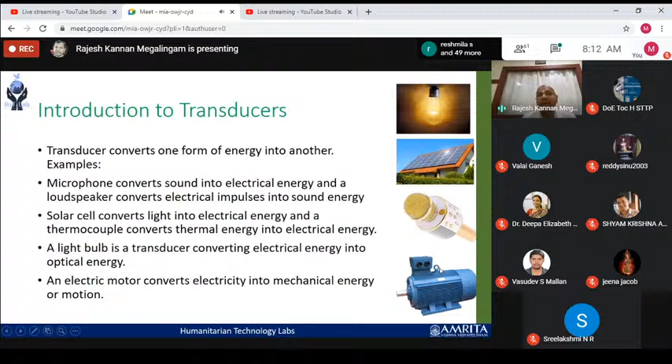So there are many categories of transducers. Electrochemical - some of the important ones in day-to-day life: battery, which converts chemical energy into electrical energy. Then electroacoustic, like loudspeaker or microphone which we deal with in day-to-day life, particularly during online classes. Then electromagnetic transducers, obviously generator, which is a common example.

Then electrostatic - we might not have dealt with that, this is not commonly used or commonly seen everywhere. Then electromechanical, obviously motors are supposed to be electromechanical, generators also. Some of you might have used strain gauges to measure force or torque.

Then comes the photoelectric transducers - you would have dealt with this, obviously a light bulb is a photoelectric transducer. In labs or for projects, you might have used photodiodes. There is also thermoelectric - temperature measurement, LM35 is a thermoelectric sensor converting temperature to electric pulses.

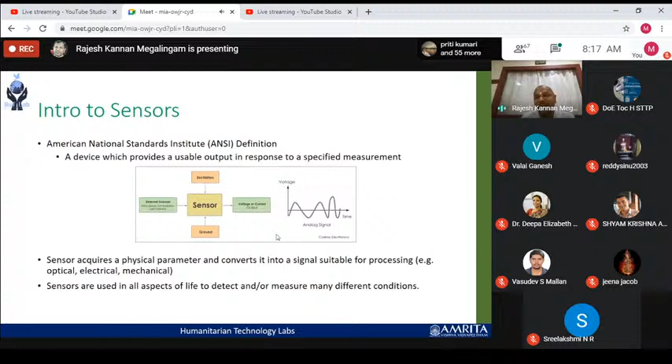So this is a typical difference shown here. When you classify something as a sensor, when you classify something as a transducer, you already know the definition: in general, it converts one form of energy into another form, but they do not quantify the conversion. That means the output is not meaningful for us to interpret.

So now if you're in your room, if your light is switched on, you get brightness, right? But that is a transducer. But how much brightness, how much lumens, you don't know. So once you go into that aspect of quantifying the amount of output through some processing, then the word sensor is more suitable.

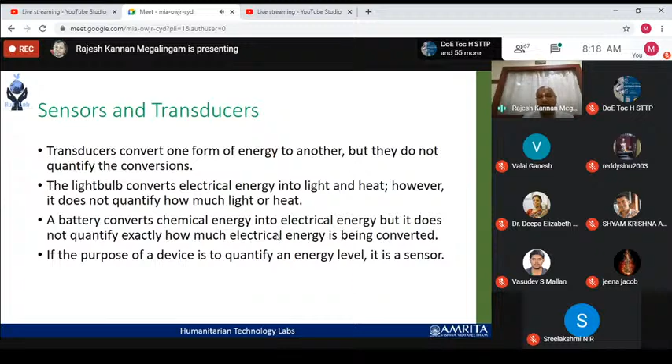So we already have 5 senses: eyes, touch, your hands, skin, your nose for smell, then the tongue for taste, and the ears for hearing capability. So the brain is the heart here, it processes whatever the input in the form of the sense organs, and then we get a meaningful output.

So any of these sensors receive signals and message the brain, which outputs a response. So when you feel something hot, when you taste something sweet, it is always the brain that is giving out this meaningful information, not your skin or your tongue.

So now we are going to go into the types of sensors. If you are already into building some robotic projects, you might have come across some of these sensors. Thermal sensor, obviously some kind of temperature sensor you might have dealt with. Mechanical sensor is very important nowadays. So many things happen where you need to measure the pressure or the acceleration, and the liquid flow,

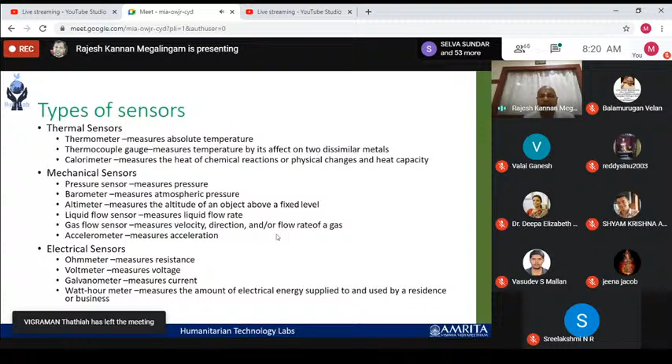Electrical sensors, most of this we would have used in the labs, particularly electrical. Chemical sensor, CO2, some of you might have used in your project. CO2 sensors are useful for detecting the presence of a human being. So that can be used in disaster management to identify victims. Then optical sensors, these are all common sensors which students build projects like LDR and all. IR, those things are all commonly used in many of the student projects.

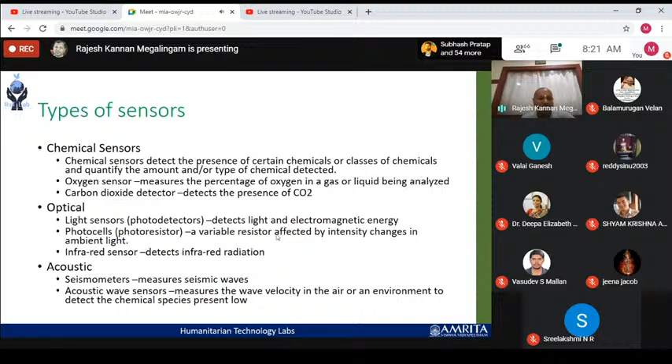So before we continue, one video demo is there. So this is a project, as I mentioned, which won several recognitions. It also won the IEEE Foundation funding of around $7,800. I think this was the first project that was funded by IEEE in our campus. That's long back, maybe 8 years before. And it also won the IEEE, I don't remember, a few other awards it won.

So this is about recognizing the hand gesture, and then controlling the wheelchair. The goal is to help quadriplegic patients or elders who don't have much strength in their arms to hold the joystick.

You would have seen the powered wheelchairs. Commonly, the control interface is a joystick, but you need to hold it and keep operating it continuously. For that, you need to exert some pressure, and your hands should be at least healthy to a moderate level.

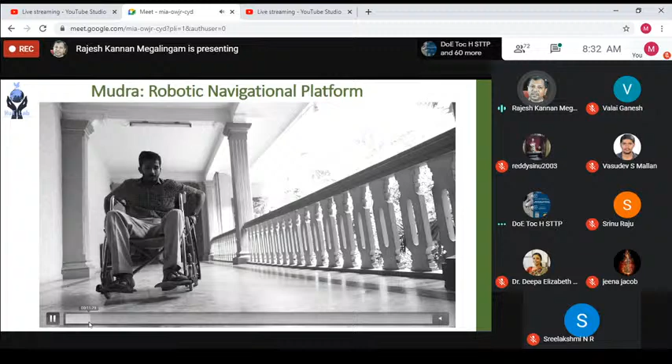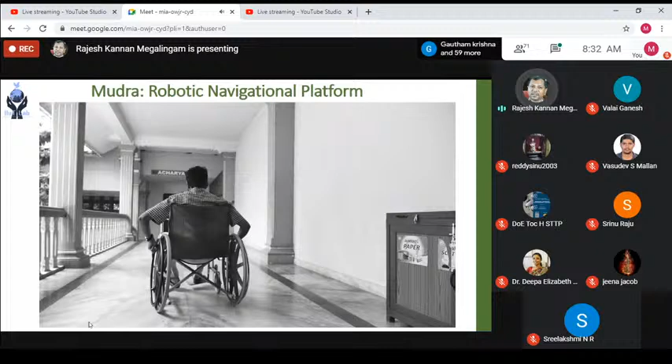You can see that people often use mechanical wheelchairs in India because for some, even the electrical wheelchairs are not affordable. There is also a social issue with dealing with people using wheelchairs. Most wheelchair users are ignored, even by their family members. So that is the situation in India.

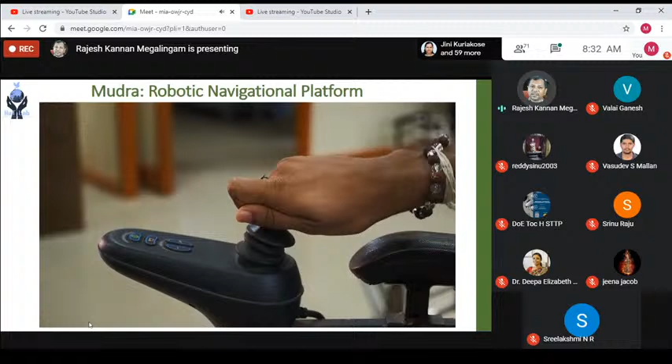Here you can see the joystick control unit, which is the default control unit used in the wheelchairs.

Here is the gesture pad, which we call the G-pad, made with an IR sensor array. The user can move the arm over the IR pad or the G-pad. This is a group of BTech students working on that.

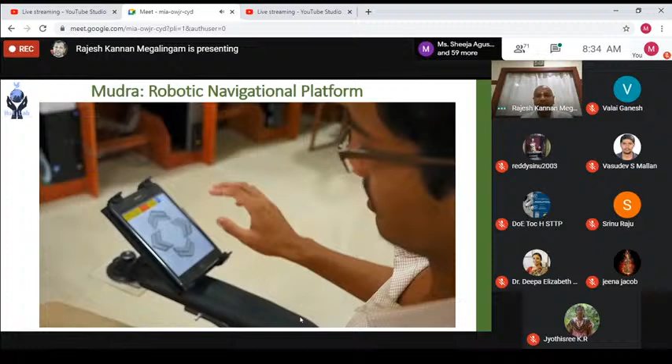I'll skip this part. You can just move the hand over this G-pad, left or right or straight or stop, so that accordingly the wheelchair can move forward, reverse, right, or left.

We also developed a mobile-based Android app. You can see a tablet used with the app with arrow marks. You can just touch the arrow marks, whether you want to go forward, reverse, left, or right.

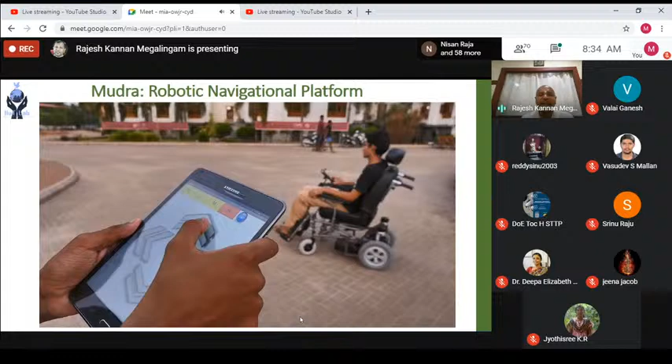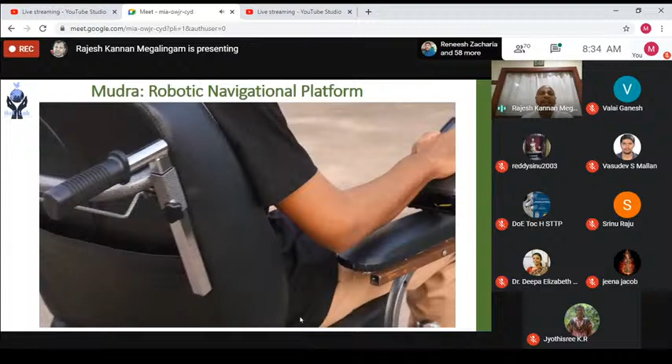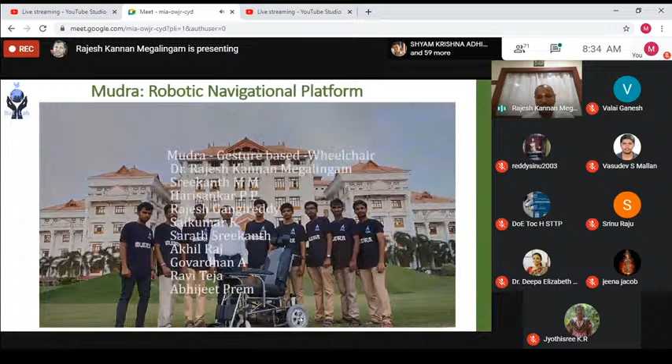The advantage is that even the nurse or caretaker can control the wheelchair. If the patient is really sick and even hand gesture is not possible, the caretaker can operate easily with the G-pad or with the app installed in the tablet. This is the group of students who worked on this wheelchair.

So now, before we proceed further, can anyone answer what sensors are used in this navigational platform? Actually, there are also actuators, because the wheelchair has to move, but since I haven't started the actuator topic yet, I am restricting my question to the sensors used in this project.

So we have encoders. What is that? We have rotary encoders, sensors. Yeah, encoder is a sensor, but in this one we are not using the rotary encoder because we are not keeping track of how much distance the wheelchair moved. Rotary encoders are normally used to keep track of how far the wheelchair or any robot traversed. So here we don't use the encoder.

I already mentioned the G-pad is made with an IR sensor, so there should be an IR sensor and a photodiode to sense the light. Those are two types of sensors. And there should also be an ultrasonic sensor to detect the obstacle, because accidentally the wheelchair should not go and hit somebody or the wall, even if the user is not alert. The robot should be alert so it should not go and hit.

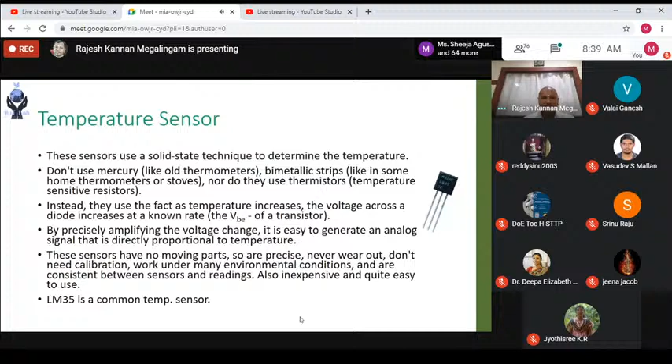This CO2 sensor, the carbon dioxide sensor, is used as a signature of human life, because in disaster hit areas, if some victim is stuck under rubble and struggling, the CO2 sensor can sense the presence of life.

Research is still going on in this area. There are some commercially available CO2 sensors which sense up to a few tens of centimeters, but research is going on to detect human presence even as deep as 5 meters. In fact, this is one of the sensors we use in one of our search and rescue robots.

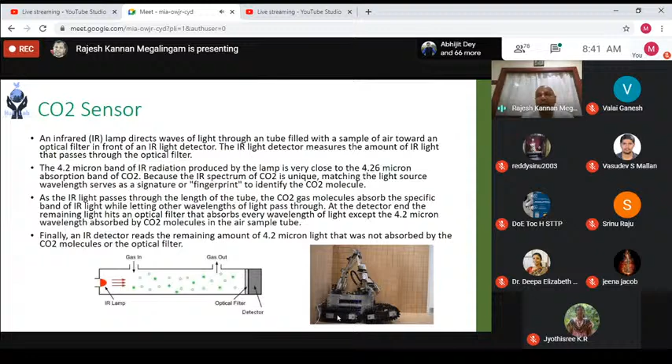As I mentioned, the human body radiates carbon dioxide. If there is a huge concentration of CO2 at some place, that means there might be a human presence in that place.

Next we go to the LDR, the light sensor. Light sensors in common detect light and create an electrical signal. LDR is one of the most commonly used sensors by students for robot projects. It's nothing but a kind of photoresistor, and the electrical quantity is resistance, which varies according to the light intensity.

If there is very high light intensity, the resistance will be low, meaning a huge amount of current can pass through. If there is no light, this acts as an open circuit because the resistance will be high, and huge resistance is similar to an open circuit, so the current that flows will be very low. This property can be used to measure the presence or absence of light, or how much light is present.

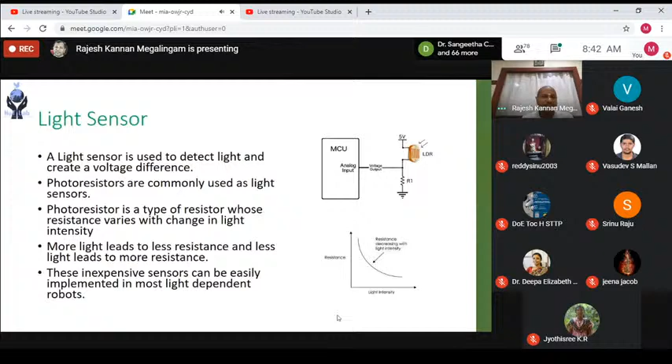Now this TSOP, a thin small outline package IR sensor, is also light dependent. Normally, for line detectors, commonly used in robotic projects for line detection, they use an IR LED and a photodiode.

The IR rays go and hit the black line, and the reflected amount of light is captured by the photodiode, and accordingly an electrical signal is generated. Based on that, the robot can traverse along the line on the ground.

But the problem with this kind of setup is that if used under sunlight, since sunlight has a good amount of IR radiation, it would affect the photodiode outcome. So you get a random, spurious output, not a predictable one, and your robot might behave unpredictably, not following the line.

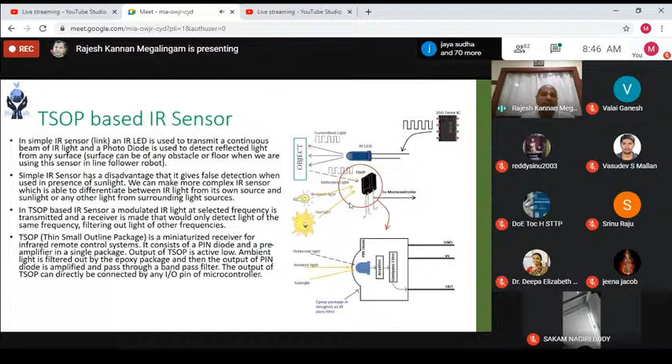Right, so now let us go to another video demo. Again, I'm thinking your audio is going to be a problem, so anyhow, I'll give a live commentary of what is going on. So I'll do a short introduction.

This was an inspiration from a Google museum in Bay Area, California, because I happened to visit this Google museum in 2013, and at that time the first car, the Google car, was on display in the museum. Myself and one BTech student who had the opportunity to present a paper at a Global Humanitarian Technology Conference at San Jose were discussing about the Google car, and we came up with the idea: if self-driving can be used for comfort, why can't you apply that to help some people? That is how we came up with the self-driving wheelchair.

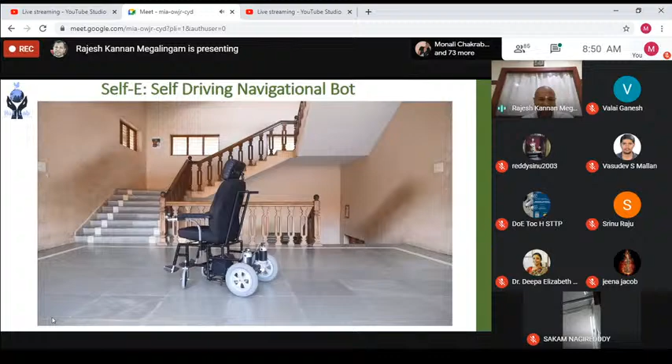Life easier, but the technology can also be extended to wheelchairs. So this is the self-driving wheelchair. The interest came out after— Sir, is the audio there, sir? Oh no, is the audio there? Oh good.

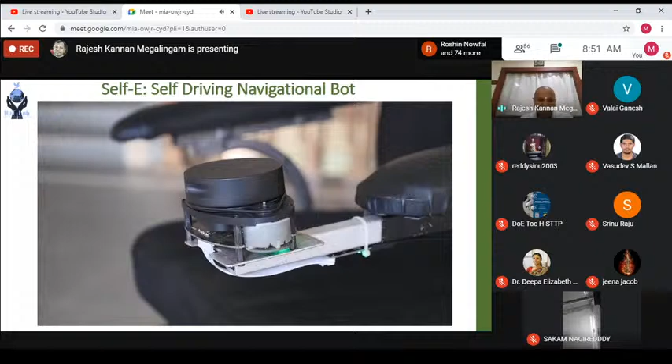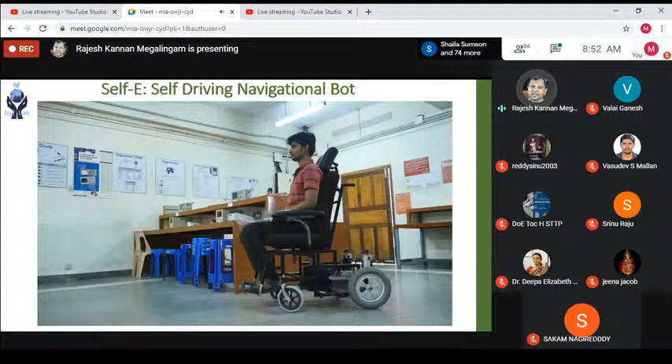To travel from one place to another in an airport, we realized that people with mobility issues face a lot of difficulties in their day-to-day travel, and most of the times have to depend on a second person. Our self-driving wheelchair, Self-E, can change the way society looks into wheelchairs. Self-E system has three phases. In the first phase, the wheelchair is driven through the environment where it has to operate and creates a map of the environment. A similar map is created in the Android application that we developed, where the user can point to the destination they decide to travel to. Once the map is created, the destination is pointed through the app, and Self-E wheelchair plans the shortest path and moves the wheelchair towards the destination. The hardware equipment we use consists of a single laser scanner. This laser scanner can identify the environment and also moving objects like we do. The onboard software automatically reroutes the path while avoiding any sudden obstacles in its path. Our self-driving wheelchair, Self-E, is fully operated using any Android-enabled device like a smartphone or tablet. The users have three different modes to operate Self-E: manual, auto, and fixed modes. The manual mode has easy access to the wheelchair with a simple direction interface where the user has to continuously navigate using the app. The fixed mode is used for navigating common places like shops in airports or rooms in hospitals where the destination is known in advance. In auto mode, the user can choose any destination on the provided map. The user has to just point to the desired location using the Android device and the wheelchair starts moving. Self-E can also navigate through tight spaces like passing through doors, corridors, and even getting into a lift. This autonomous technology can be used to deliver goods in industries, food in restaurants, people in airports, hospitals, and grocery shops, etc.

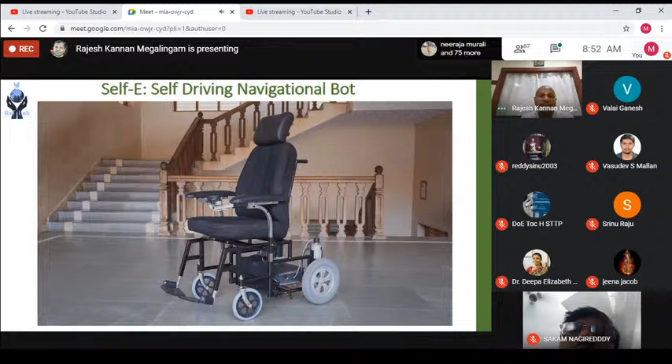Yeah, so you can see that it has good scope for transporting COVID patients, right? Because the patients themselves can navigate, thereby avoiding direct contact with wheelchair pushers or any caretaker.

Apart from being used in general cases like elders, right, airport people need a lot of wheelchairs, right? And the problem in the airport is that there will be a wheelchair pusher who would take them from the entrance of the airport to the gate. For example, if these elders traveling in the wheelchair want to go for some food or a bathroom break, it will be very difficult because the wheelchair pusher may not help, right?

So in such a scenario, if there is a self-driving wheelchair, people can be at their leisure. They can go to a restaurant to eat, they can have a bathroom break, they can go for shopping even before reaching the gate. So now coming back to our topic, what are the sensors do you think that is used in this one?

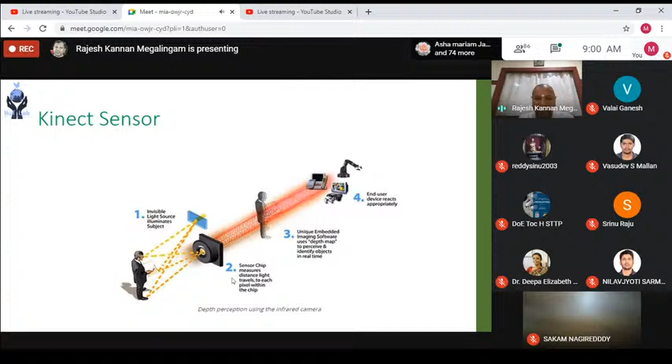This data is integrated with the Kinect software, which is custom software, not open software. So the sensor and the software are integrated together, and very advanced algorithms work on the data collected from these sensors for facial recognition, depth identification, or sound and voice recognition.

When it is received, the LiDAR is able to map how far this object is. It will not know what the object is, right? It's not like Kinect, which has a camera. This has only a laser scanner, so it can only map the depth. Accordingly, a map of the room is created, and once the map is created, you have all the information you want about a room or facility, and we can use that for navigation.

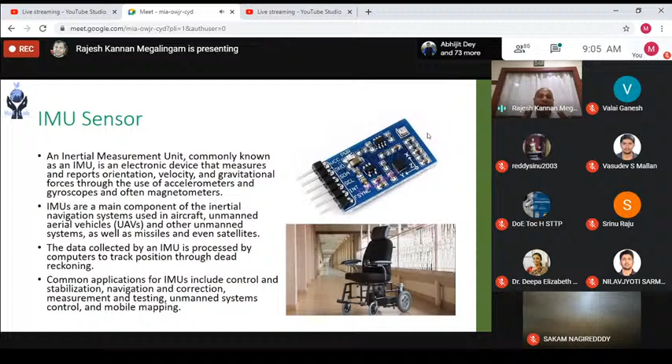Now I'm going to show you one robot that we developed at the lab.

Let us see. Is it audible? No sir, you're not able to hear? I don't know why some works and some doesn't work. Speech recognition, can you hear?

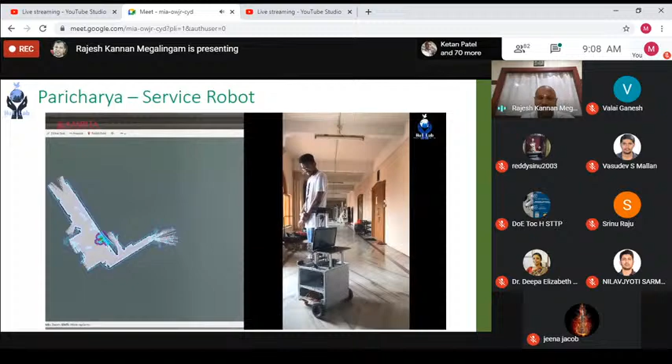The mapping of the environment is done by the gmapping package. This is the map of our HUT lab, which is divided into 4 different sections: Section 1, Section 2, Section 3, and Section 4. Navigation to the desired location is obtained by localizing through the AMCL package and integrating it with the move-base package.

For object recognition with the Kinect sensor, we are using an algorithm called YOLO, where the robot needs to be trained with different images of objects. The robot can recognize the trained objects and also gives the object midpoint coordinates with respect to the origin of the Kinect sensor for pick and place purposes. In case of a person, the robot can estimate characteristics like gender and age.

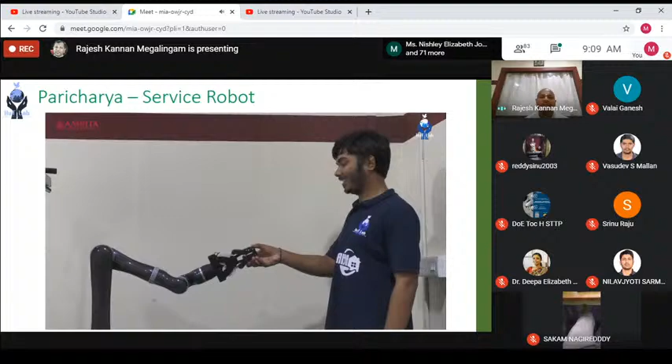Currently, we are using the 6 degree of freedom Kinova arm for pick and place and for basic human-robot interaction. Here is an example of human-robot interaction where the arm is used. We are currently developing a gripper to serve as an end effector for the arm to hold objects.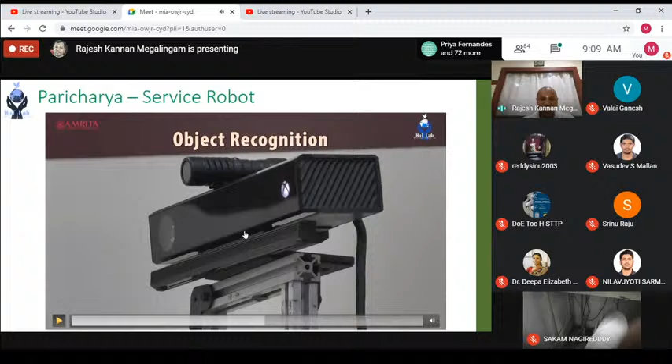So what sensors do you think are used in this one? Some of this we already saw. The Kinect sensor, you could have seen at the top of the robot. Yeah, so that is the Kinect sensor here. There is also a mic attached to that for voice recognition. So there is image recognition, object recognition. You can see laptop, bottle, identified chair.

Face recognition. So this manipulator, the robotic arm, also uses sensors. Can anyone tell what sensors are used in this manipulator? Okay, so that might be a difficult one. Let us see the sensors. As we look at the sensors, we can get into more details about the sensors used in the manipulator.

So next sensor is a load sensor. If you want an immediate example, you would have seen electronic weighing machines in shops. Even in grocery shops nowadays, electronic weighing machines are used. You can see the weight in terms of the decimal number. So the load cell or sensor is being used in order to get the weight information.

The forces such as tension, compression, pressure, or torque are converted into electrical signals. These electrical signals can be calibrated, and the amount of weight or force or tension, whatever you want to measure, can be measured with that. There are several types of load cells: hydraulic, pneumatic, and strain gauge. Depending on the application, you can choose one of these load cells.

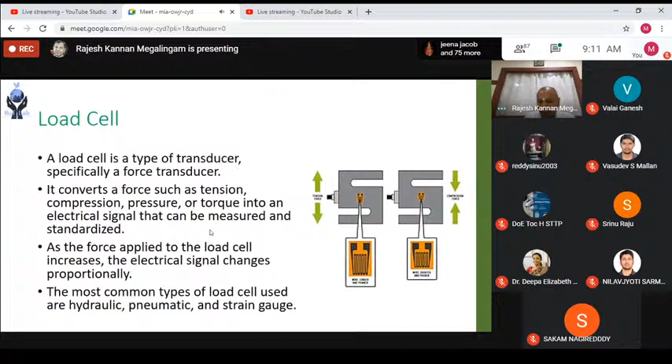A commonly used sensor you might not have thought of as a sensor is the potentiometer. You already know it as a variable voltage device, depending on the resistance. So depending on the varying voltage, you can measure the quantity you want to measure. It's commonly used for volume control, like in your audio equipment.

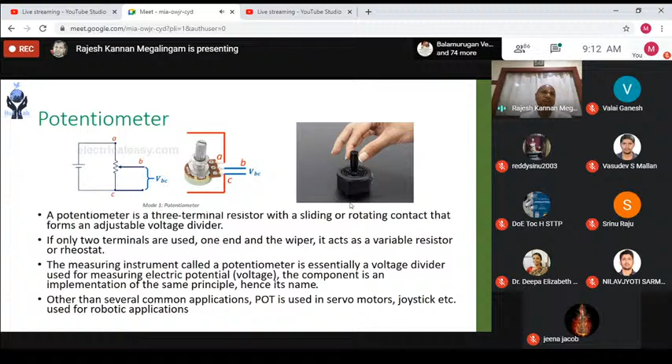You can see even in a joystick, the potentiometer is used. One of the common applications is in servo motors, where they use the potentiometer to get feedback and keep the motor powered up correctly. That is the actuator actually - the servo motor is an actuator, and in that, the potentiometer is used.

Now coming to the microphone. The microphone converts sound into electrical energy. There are two types of microphones: dynamic and condenser. Both use a kind of diaphragm plate where, when the sound energy hits, it generates vibrations, and there is a voice coil which converts these vibrations into electrical signal.

Dynamic microphones are commonly used in open air theaters or auditoriums, where huge sound is being dealt with. Whereas the condenser microphone is used in voice processing and audio processing, where you need to capture even a minute sound in a very controlled environment. You use the condenser microphone.

Current sensor is also commonly used - the amount of power. These are all used in robots. I can show one of the robots where we use this, in fact the manipulator I showed. A current sensor can be used to find out how much current is drawn by the actuators used in the manipulator or the robotic arm.

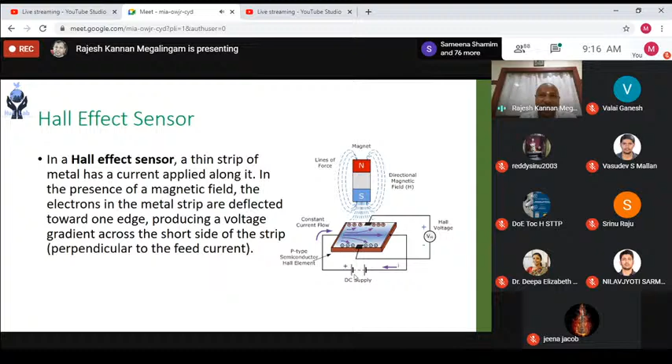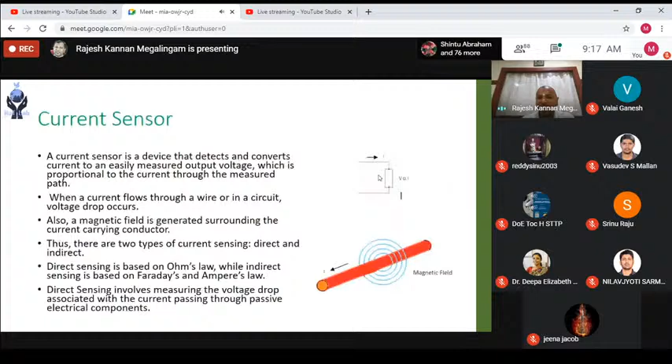This is another sensor used in advanced manipulators. You saw that the robotic arm used in that robot is a Kinova robotic arm - this is the robotic arm you saw in the video. That is a very advanced, lightweight manipulator which uses torque sensors.

What is torque? Torque is a rotational force. It's like you have a regular force, which is a directional force, whereas torque is a force in rotation. So depending on this torque,

the sensor is built with a strain gauge. The strain gauge is a similar concept to the load cell - in fact, some load cells also use strain gauges. Depending on the strain created because of the rotational force, this strain can be converted into an electrical signal, processed, and then calibrated to find out how much torque is being used in the actuators.

So that is about the torque sensor. I think there are several other sensors, but I'm stopping here with the torque sensor. Then we are going to switch to part 2 of the presentation, which is going to be the actuators. But before we go to that, is there any question on the sensors?

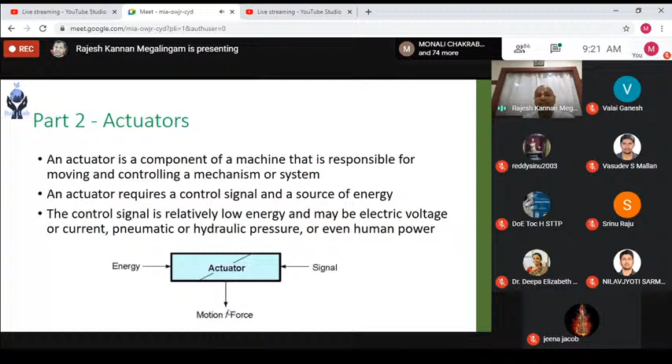So there are commonly 5 types of actuators. Hydraulic actuators use a liquid, a kind of fluid, in order for them to operate. Pneumatic actuators use gas or air in order to make them work. And electric actuators are what most electronics and electrical engineers might have witnessed, because hydraulic and pneumatic are mostly used by mechanical engineers in factories, some hi-fi stuff, but not in the kind of robots that we build at the labs.

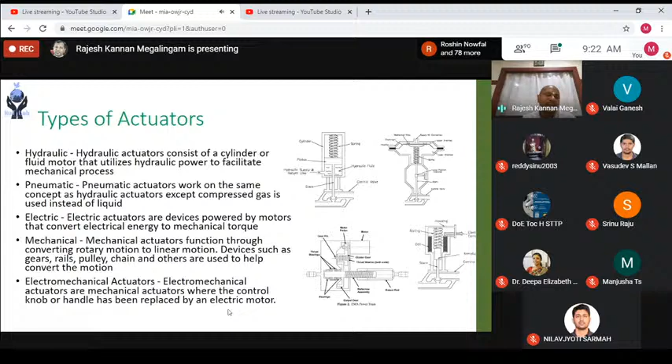And there are mechanical actuators, purely mechanical in nature - devices such as gears, pulleys, chains are some of the mechanical actuators. There are also electromechanical actuators, like an electric motor - if you have a control knob with the electric motor, and you rotate the knob or the potentiometer, the motor speed can be increased accordingly. So those kinds of actuators, you call them electromechanical actuators.

It's a very, very complex and challenging system, because most robots that are used, or that you would have seen, operate in a known, predictable environment. If you see a pick-and-place robot, it's operating from the ground, so there's no worry about the weight factor or stability in particular. Whereas this robot, the coconut tree climber, is very challenging because it has to operate in an unknown environment - each coconut tree in the world is unique. So for a perfect robot, you must have tested it with all the coconut trees in the world, which is impossible.

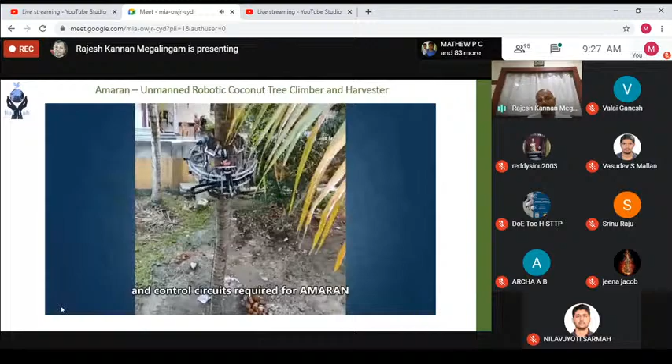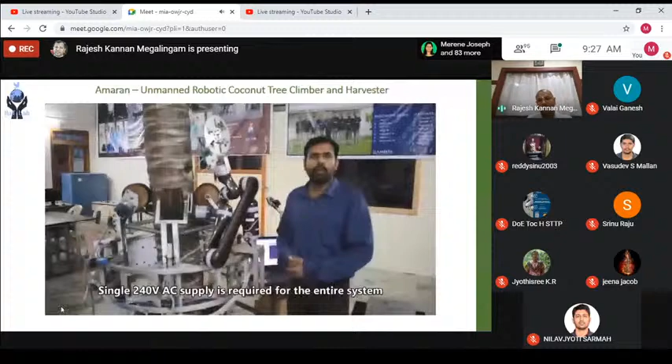A Kinova 6-DOF robotic arm with a customized electric cutter is used as the harvester. Using track motion, we are increasing the workspace of the harvester. A single phase 240 volt AC supply is required for the entire system.

So that is about the project. Some of the recognitions and awards - we filed 3 patents, one US patent already approved for this.

Now we will go to some of the common actuators, DC motors. All engineering faculty should know the basic principle of the DC motor. You have a coil, and a coil carrying current generates a magnetic field, so it can become an electromagnet. That principle is exploited in almost all actuators.

This is a simple DC motor which uses the carbon brush to keep the contact while rotating. The wires should not get twisted, so they use this carbon brush mechanism.

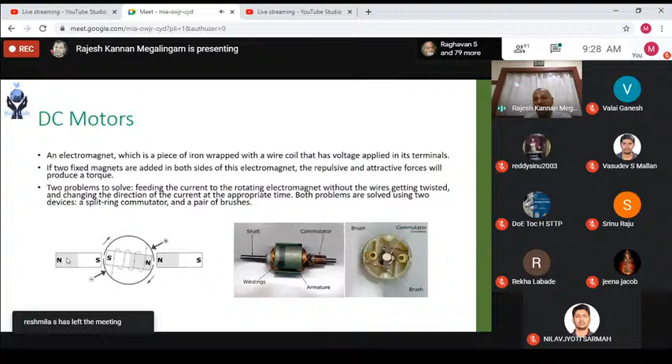Now there is another version, the DC geared motor, which gives you more control compared to the DC motor. The DC geared motor produces a lot of torque, meaning the load you can carry is increased. With the plain DC motor, you don't have that control.

A precise control is not possible with a plain DC motor. Whereas with a geared DC motor you can bring some precision, but not as much as BLDC motors or servo motors. Geared motors, and DC motors in general, are not so precise. Also, DC geared motors are costly because of the gear setup.

Also, if you look at speed and torque, they are inversely proportional. If you want high speed, your torque will be less. If you want high torque, your speed will be less. That's something that always binds these two.

Still, geared motors are very commonly used in robots. In fact, this is one of the robots we developed, the search and rescue robot - this is the 3rd version of the robot. I can show you the video, which uses geared DC motors.

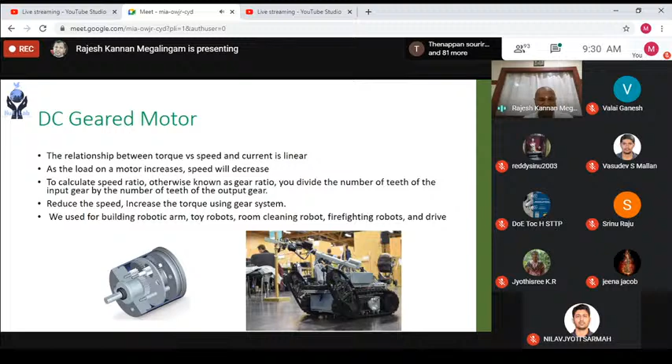For precise control, a servo mechanism is used, with feedback built into the servo motor. This gives very precise control, because if you want to accurately move to a specific length in millimeters, you need a servo motor. For example, if you want to build a pick and place robotic arm, you can use a servo motor.

Normally, pick and place arms that students build use servo motors. But in reality, industry uses BLDC motors because of higher precision and because they can afford the cost. BLDC motors need a special controller which makes them very costly, whereas servo motors can be controlled with an ordinary microcontroller, even Arduino is enough. So students find it easy, and for student projects it's okay, but there are very hi-fi servo motors used in industry.

We built a robotic arm in this coconut tree climber. The one you saw in the video uses a Kinova manipulator, which is the 12th version. This one is the 8th or 9th version. Till that time we were using only servo motors for all the degrees of freedom, all the joints. But we had a lot of issues, as I mentioned, with coconut cutting, cutting as bunches requires very precise cutting. We had a lot of issues with the servo motor, so we switched to the Kinova arm, which used BLDC motors.

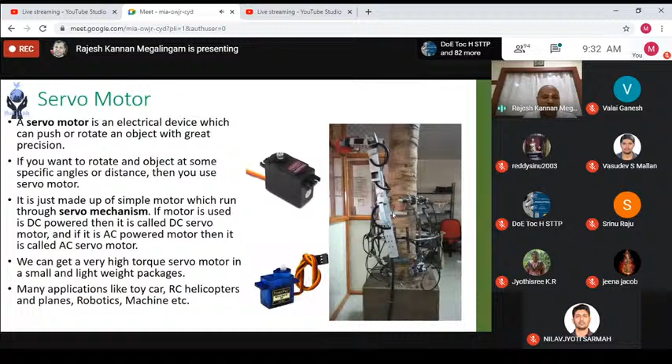So this is the servo mechanism. I mentioned something about the potentiometer being used, you can see that part is being used. The servo is made up of a simple high RPM DC motor and a very compact gear mechanism, which is what gives it the name servo motor.

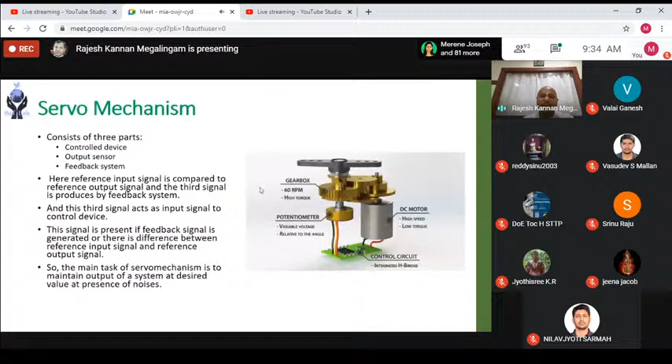You can ask, how is it different from a DC geared motor? That is where the feedback comes into picture. In a DC geared motor, you don't have feedback through a potentiometer. So when you power up a DC geared motor and don't operate it, versus powering up a servo motor and not operating it, the servo motor would be able to supply the same amount of current to the load attached to it, whereas the load attached to the DC motor will not experience the same current if you just energize it without operating it. That is the difference, and that's why servo is much more useful in precision robotics.

So this is a search and rescue robot, a short video you can see. This is the third year we are into this project. We already built 3 versions, with 3 groups of bachelor students working on it, and a 4th group is currently working on it.

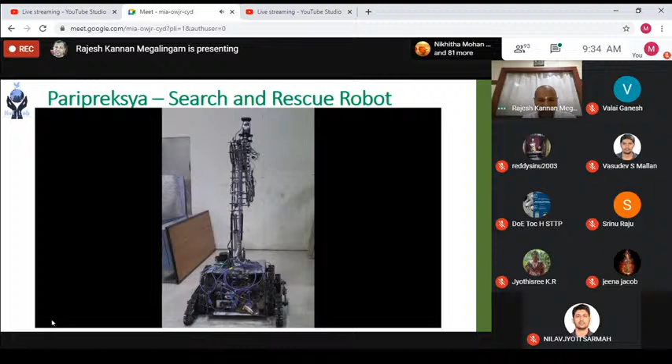So this is the first version of the robot.

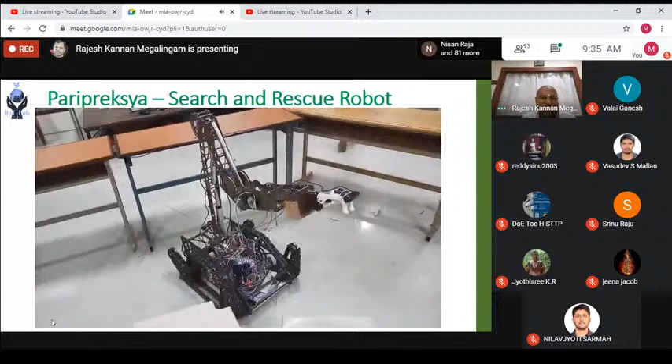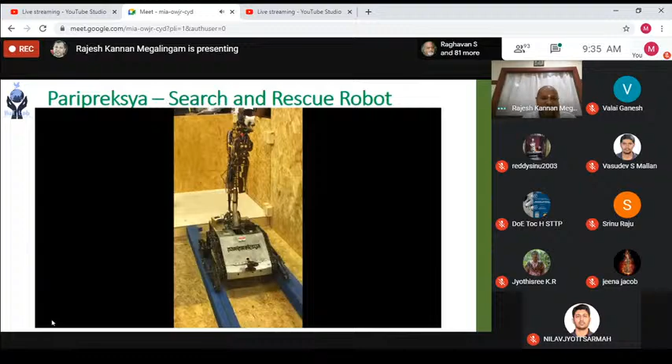This robot went to the Robo Cup Germany 2018. We were in Germany, and we were the only team from India.

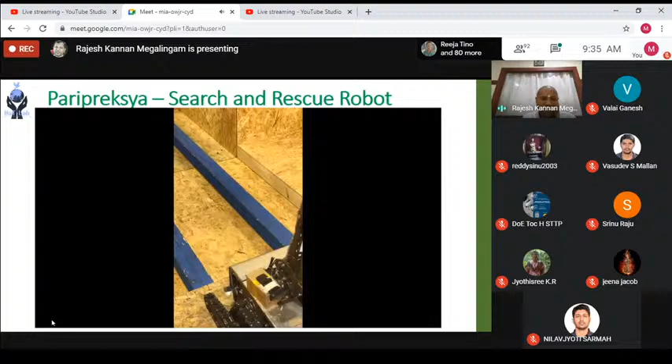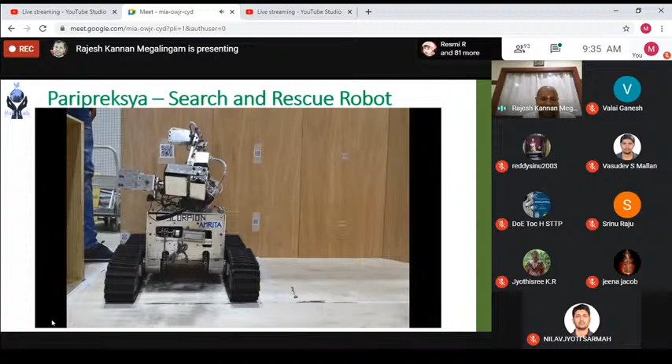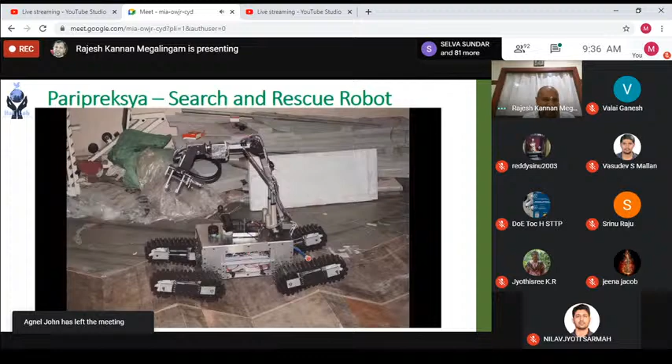So the second version, from 2019 - actually the first one was in 2017, this one is 2018. We went to Japan for the World Robot Summit, and now we are testing it at the lab. This is the second version.

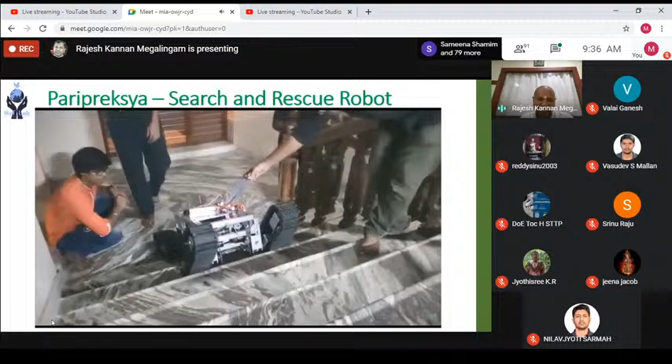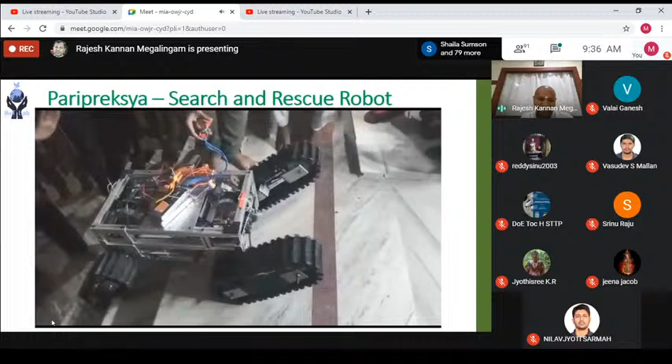This is during the competition at Japan, Tokyo.

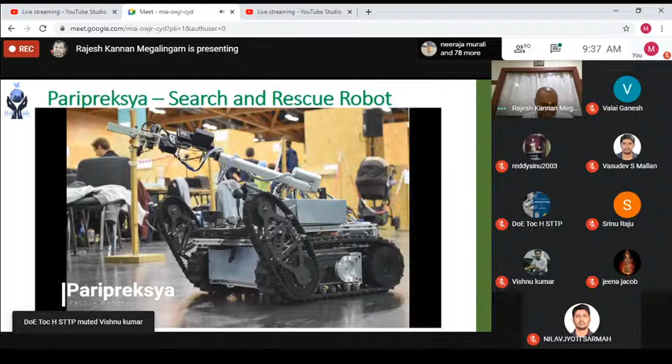So this is 2019 January, the third version. You can see there are only 2 grippers.

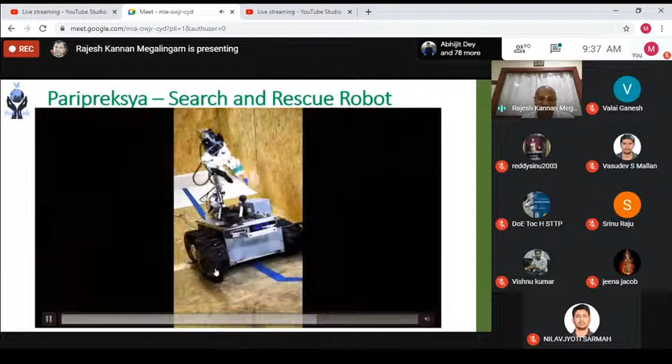The operator won't be able to see the robot directly. There is a camera on the arm, and you can see the lidar sensor also used here. Through the camera, the operator has to see the environment and operate the robot. There will be a cabinet for the operator to operate from.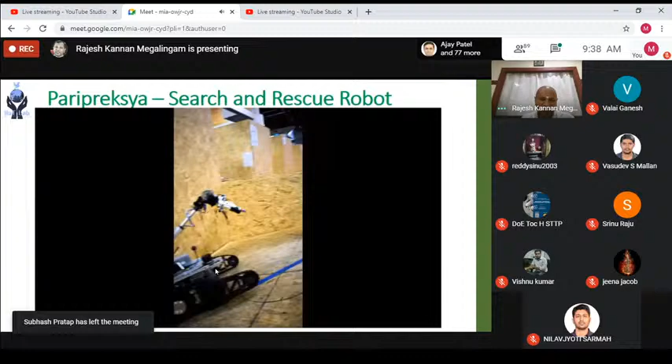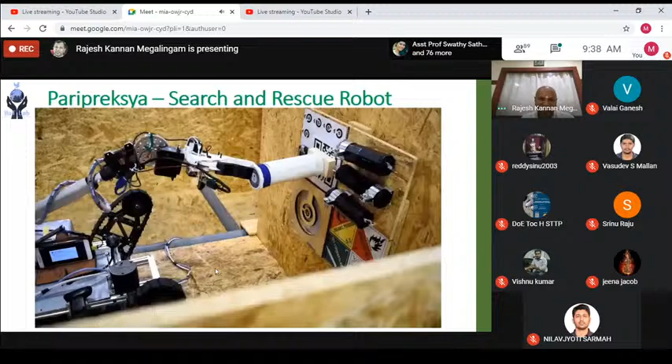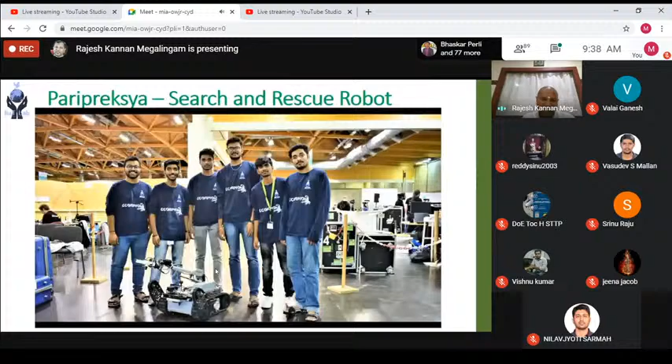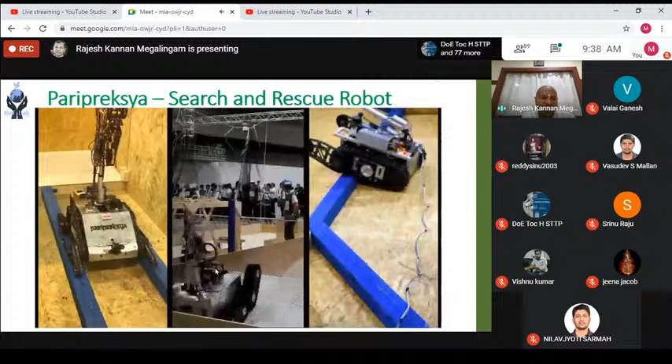So this is the cabinet. The operator can see only the video feed, what the robot sees. This is a very complex system with several actuators and sensors, multiple cameras, all of which should work in coordination. And the operator cannot see the robot directly, which is another challenge.

But that was a very good experience for us, and we are still working on so many things related to it. So the next one is the linear actuator. In the first version of the robotic arm, we actually used a linear actuator to control the arm.

Usually this kind of linear actuator you could have seen in the JCB, right? A very huge linear actuator being used to excavate things. So there is a DC motor, and there is a conversion mechanism. The rotational force will be converted into a linear force, like a screw type mechanism. So this linear force can tighten or loosen the screw, and accordingly the shaft of the linear actuator moves.

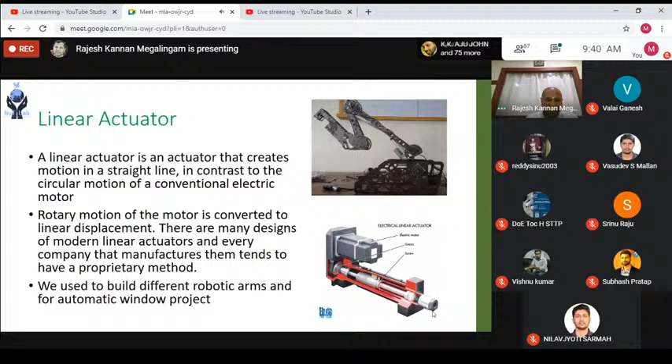So this is another actuator, the permanent magnet DC motor. That is what we used in all the wheelchair projects, all the navigational boards for transporting people. We use the permanent magnet DC motor.

Usually in a DC motor, electromagnets are used. But here it is a PMDC because it can handle very high power and it can be very compact. Because to carry people, 80 kg average human weight, you need a very high power motor. But if you go for a quarter HP or half HP motor used for pump sets and all, the controlling part is very difficult and it occupies a huge space. And they are not battery operated. So those are the reasons PMDC motors are compact.

They are also controllable. You can have electric brakes with the PMDC motors. You can have a very high torque. It can handle very high load. So these are some of the advantages of the PMDC motors.

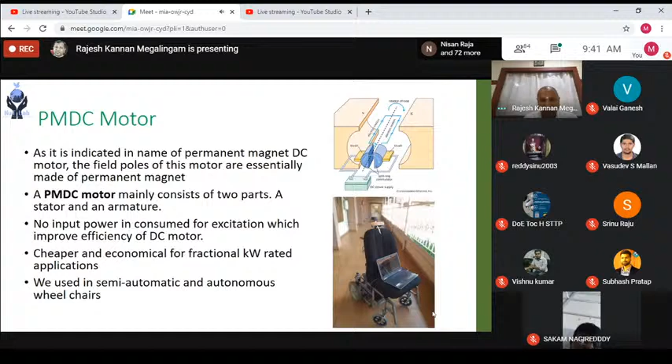So as I mentioned, BLDC motors are the commonly used motors for high precision manipulators. Again, everything is about your north pole, south pole, magnetic field, electric field, and how you set up or construct the motor. That is what makes whether you call it BLDC or whatever motor.

So obviously BL stands for brushless, because with the brushed DC motor, one thing is it's not so user friendly when it comes to control mechanism. Precision control is not possible, and it has to be always energized. So now this BLDC motor is brushless. Obviously, you can have some electronics to control the rotational force.

And you can see the setup. There are multiple coils which generate a magnetic field or a current in a certain way. You can see current A, current B, and current C being generated. And with the help of these currents, you can decode them and always know the position. They also offer very high torque when coupled with other drive mechanisms or gear mechanisms.

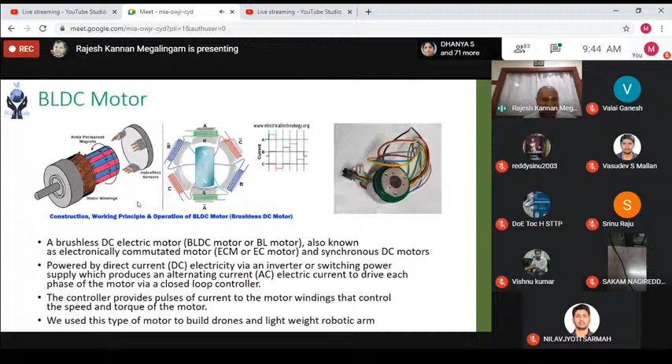All right, so that is about the BLDC motor. I think we have almost come to the end of the actuators. Maybe in a few minutes we can close this.

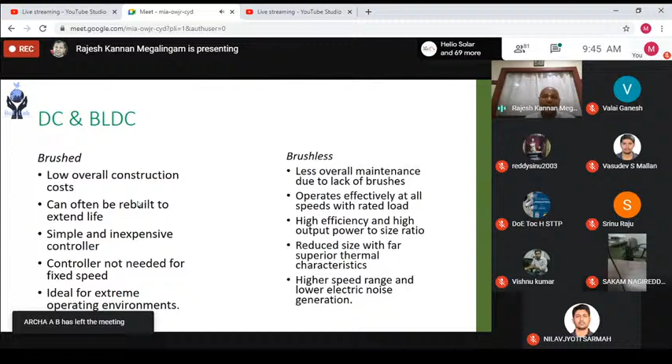So this is a difference I already mentioned while discussing the slides, the DC and the BLDC. Obviously, DC is brushed DC motor, and BLDC is brushless. In a brushed DC motor, the carbon brushes wear and tear, and once they wear and tear, the efficiency reduces. Whereas a robot, you are going to operate for several times and for a long time, and if your outcome is affected, efficiency is affected, the robot behavior is also going to be affected, which you don't want. So that is why for robotic applications, BLDC motors are preferred.

If you have studied about AC or DC motors, you could relate this to our coconut tree climber. The original one had a 10 RPM motor, and it would take about 5 to 8 minutes to climb a coconut tree of 5 or 6 meters, because 10 RPM is really slow. As I mentioned, we needed very high torque actuators because the body is very heavy, but it took a very long time to reach the top.

What we did was come up with an AC geared motor, which we fabricated ourselves. The advantage of AC is it has very high speed, and the gear mechanism gave very high torque. So in the latest version in the video you saw, the robot is able to climb the entire 5 or 6 meters in 8 to 10 seconds. It just climbs so fast.

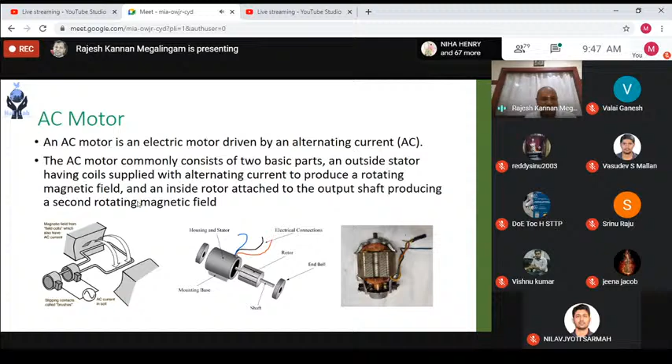So that is about AC motors. Now one more thing is about the stepper motor. You might have used some tiny stepper motors, particularly if you have observed 3D printers - you could have noticed 3 stepper motors are used for 3 directions. In fact, we built our own 3D printer, so that is why we know about these motors.

What happens is, instead of smooth rotation, it actually takes a step, you can see this structure is itself built like this. The internal core is a multi-toothed magnetic rotor, and the external core is also kind of a multi-toothed one. So the north pole and south pole generated at each of the core and rotor keeps the motion of the motor, and then you can get up to a precision step of even 0.2 degrees.

That's the step you can get, so you know exactly how much the extruder - the printer extruder - has to move in order to print a 3D structure. So it's a very precise mechanism, though it's not so fast compared to a BLDC motor. A BLDC motor can be really fast, and the precision is also very good - 0.2 or even 0.1 degree precision in advanced ones.

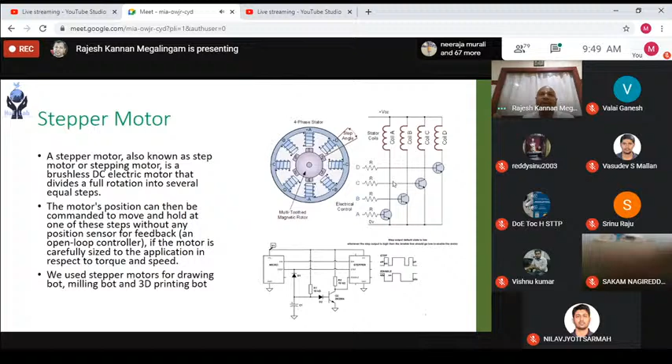This setup's equivalent circuit is shown here. As I mentioned, the basic thing is only the coil. You energize the coil, you create whichever structure you want, and whichever motor you create, you can call it by some other name. The structure is such that the basic principle is the electromagnetic principle: a current carrying coil should produce a magnetic field and vice versa.

I think we have come to the end of the lecture, so if you have any questions, I would like to take them now.

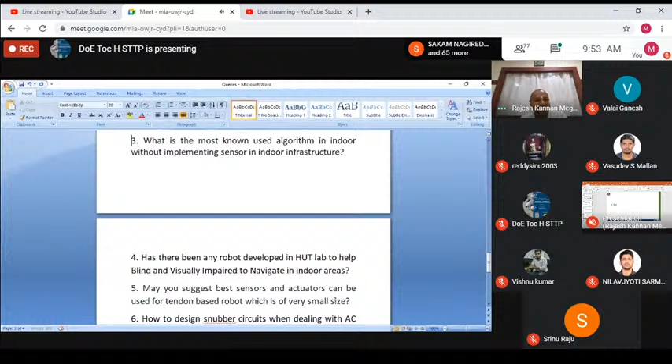Fourth question: has there been any robot developed in HUT lab to help the blind? Actually, student groups work on all these projects. One of the successes of HUT lab is that I'm able to find groups of juniors to work on a project and continue for several years. But I'm not able to find motivated groups for all the projects. In fact, we had a very good working model for the visually impaired, but that was stopped in 2016 or 17 because there was no further group to continue with it.

May you suggest the best sensors and actuators that can be used in tendon-based robots? We have not worked on very small size, tiny robots, so I don't know about that. I cannot answer that question because I don't have any experience in that area.

How to design a snubber circuit when dealing with AC actuators? Well, I was not working on implementing this circuit. Maybe one of our researchers might be able to answer that. If you email me, I can see whether I can help you with that question.

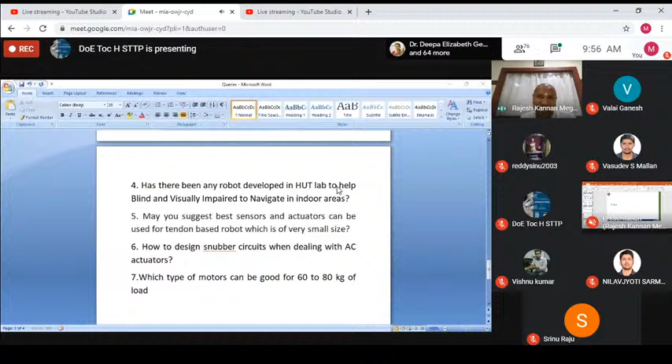You can also go for servo motors. There is a company, I forgot the name... for a 100 kg load we bought a motor, it was around... Torxis, Torxis. Right, that's a servo motor which can handle 100 kg load, but the problem is it costs about $320, you need to pay $320 for that. So you have to keep all this in mind while deciding on motors for such loads.

Any other question? I think I answered all the sub-questions. Sir, no more questions, sir.